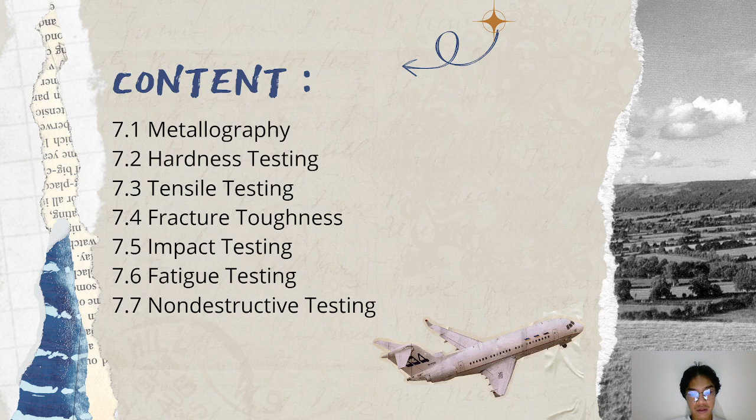Testing and inspection of metals, the quest for quality. The level of quality of a product or service may be judged by the customer based upon conformance to the relevant set of specifications or standards, or lack thereof. Quality may be defined or judged from a subjective comparison against an ideal standard or similar product, or it may involve a quantitative feature or characteristic of a product or service. This is the traditional definition of what is called product quality.

Quality can also be defined by the degree of variability in the process or service. This concept of quality is the underlying basis of statistical process control. All products and services have variability because it is impossible for all units of a product or service to be made exactly alike. A simple example is the cutting of a bar to a specific length. If several separate cuts are made, the resultant pieces will vary in length by some measurable amount. Variability may be difficult to measure when a product is made by precision equipment, but variability is always present.

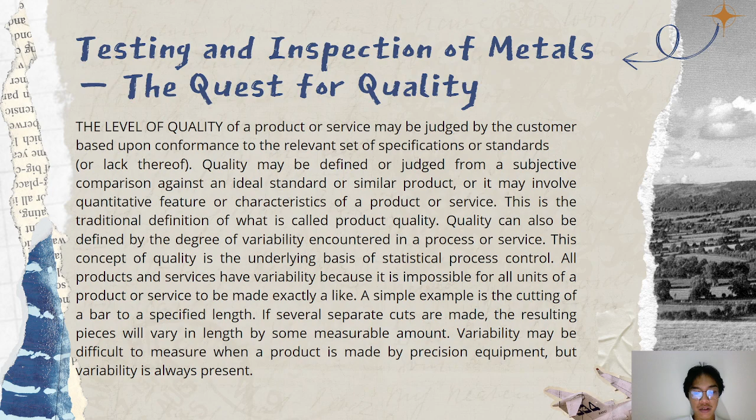7.1 is metallography. You can see the picture 7.1, the macrograph of the Elbogen iron meteorite prepared in 1808 by Count Widmanstätten and Schreibers using heavy etching in nitric acid. After rinsing in water and drying, printer's ink was rolled on the etched surface, and the sample was pressed onto a piece of paper.

In picture 7.2 is the figure of José Ramón Vilella, the distinguished metallographer who understood the need to prepare representative surfaces in metallographic examination. Picture 7.3 is an example used by Vilella to illustrate the effect of disturbed metal on the appearance of pearlite.

In A is a polished surface covered by a layer of disturbed metal. In B is the same field after removing the layer of disturbed metal by alternate polishing and etching, revealing the true structure of lamellar pearlite. Etched in picral; original magnification is 1000.

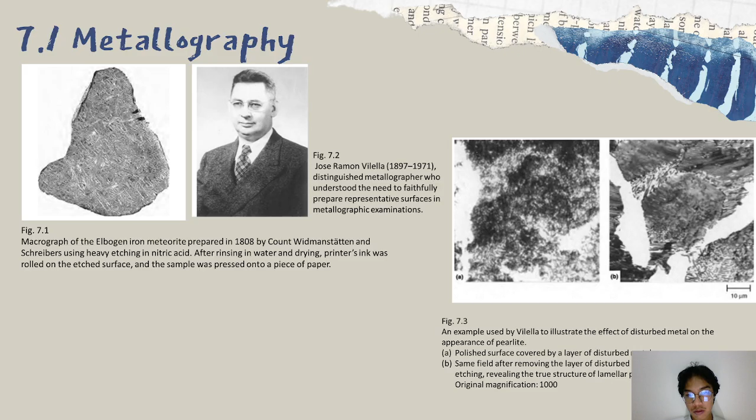7.2 is hardness testing. You can see picture 7.7, the diamond cone Brale indenter, shown at approximately 2x. In B, you can see the comparison of old and new US diamond indenters.

The angle of the new indenter remains at 120 degrees, but it has a larger radius, closer to the average ASTM specified value of 200 micrometers. The old indenter has a radius of 192 micrometers. The indenter with the larger radius has a greater resistance to penetration of the surface.

Figure 7.8 is microhardness indenters. In A is a schematic of the square-based diamond pyramidal indenter used for the Vickers test and an example of the indentation it produces. In B is a schematic of the rhombohedral-shaped diamond indenter used for the Knoop test and examples of the indentation it produces.

The indentations shown on the right side of both A and B were made in the ferrite phase of a ferritic-martensitic high-carbon version of 430 stainless steel with, left to right, 500, 300, 100, 50, and 10 gf test forces. Original magnification is 250 and 300 respectively. Figure 7.4 is a dual specimen mount for a sample holder.

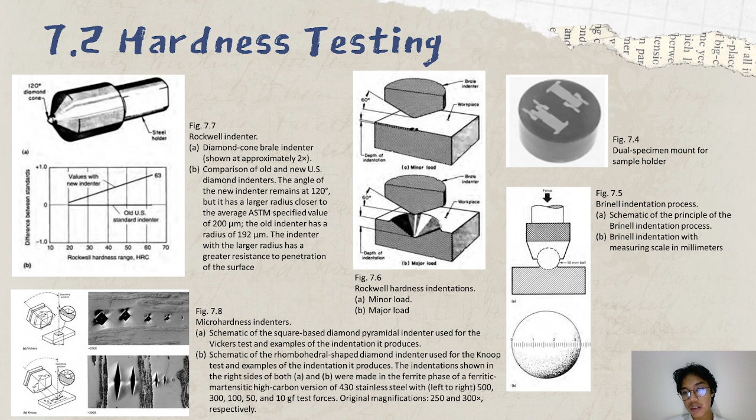Figure 7.5 is the Brinell indentation process. In A is a schematic of the principle of the Brinell indentation process. In B is a Brinell indentation with the measuring scale in millimeters.

Section 7.3 is tensile testing. Figure 7.11 shows the components of an electromechanical screw-driven testing machine for the configuration shown.

Moving the lower intermediate head upward produces tension in the lower space between the crosshead and the base. Figure 7.12 is a schematic of a basic servohydraulic closed-loop testing machine.

Figure 7.10 is a little giant hand-cranked tensile tester of Tinius Olsen, circa 1900. Figure 7.13 is an example of a gripping method for a tension test piece.

In A is a round specimen with threaded grips. In B, a butt end specimen constrained by a split collar. In C is gripping with serrated wedges.

In D is a sheet specimen with serrated wedge grip. The hatched region in C and D shows bad practice of wedges extending below the outer holding ring.

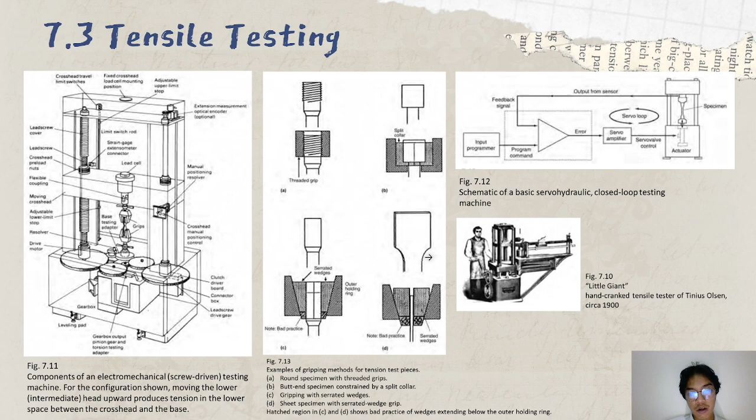Section 7.4 is fracture toughness. Figure 7.14 is a test setup using wedge grips.

In A is a flat specimen with axial extensometer, and in B is a round specimen with diametral extensometer.

Figure 7.15 shows a through-thickness crack of length 2a oriented perpendicular to the applied tensile stress. The shaded region surrounding the cracks represents the material that carries little or no load due to the presence of the defect.

Figure 7.16 is the SS Schenectady after a sudden fracture due to rapid growth of a crack that started in the hull weld.

Figure 7.17A shows the effect of thickness on the state of stress and fracture toughness at the crack tip. Figure 7.18 is the stress distribution ahead of a crack.

Figure 7.19 is an example of specimen types used in the KIC fracture toughness test, per ASTM E399, reference 7.9.

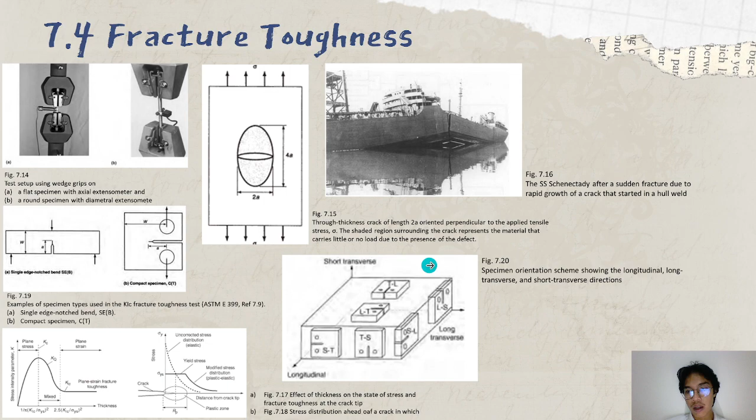Figure 7.20 is a specimen orientation scheme showing the longitudinal, long transverse, and short transverse directions.

Section 7.5 is impact testing. Figure 7.21 shows a standard impact testing approach. In the impact test, the specimen is subjected to dynamic shock loading to evaluate the material's response to rapid changes in loading, such as experienced by an axle shaft when a car hits a pothole.

The amount of energy required to break the specimen is absorbed by the pendulum, which reduces the height to which it rises. The difference between the unimpeded rise height, h, and the height after breaking the specimen, h prime, represents the energy absorbed in breaking the specimen. This energy, h minus h prime, expressed in newton-meters, joules, or foot-pounds, is the result.

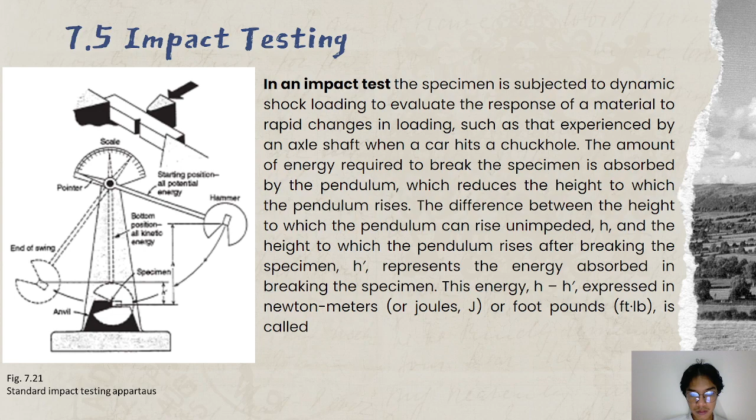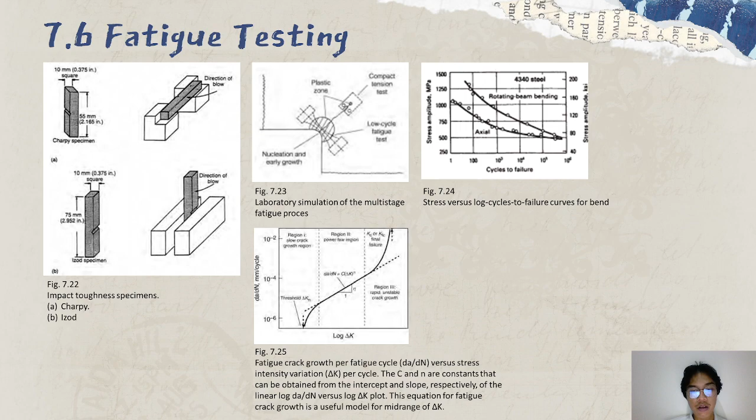Table 7.2 shows the relative use and merits of various non-destructive testing methods, with parameters compared across ultrasonic, X-ray, eddy current, magnetic particle, and liquid penetrant test methods.

Figure 7.27 shows an electromagnetic yoke, showing position and magnetic fields used to detect discontinuities parallel to a weld bead. Discontinuities across a weld bead can be detected by placing the contact surface of the yoke next to either side of the bead.

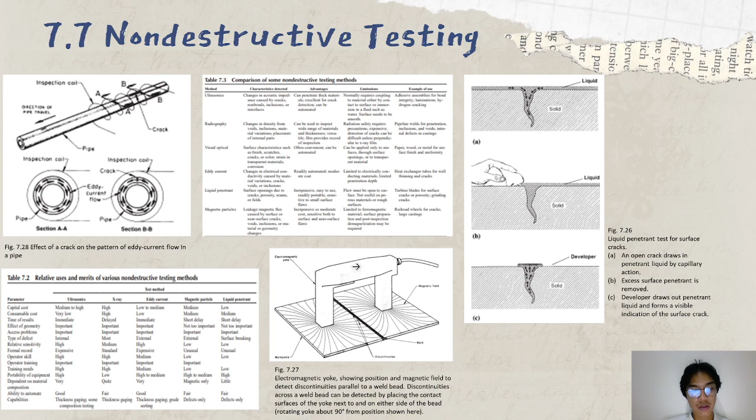Rotate the yoke about 90 degrees from the position shown here.